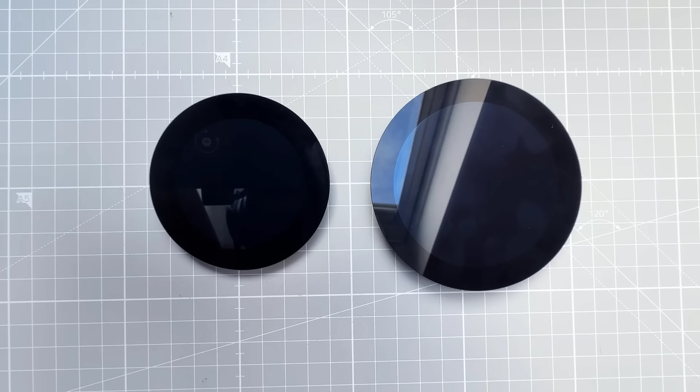So in the last two projects, I have used those Nextion round displays from the new Edge series, and I thought it would be nice to have some kind of housing, some kind of enclosure for those displays. And I have a 3D printer, so I can create something like this, but can I get something made from metal?

Well, the answer is of course yes, because I have a new machine called the Makera Carvera Air, and I will try to use that machine for the very first time to create something useful and, of course, as usual, show all my steps.

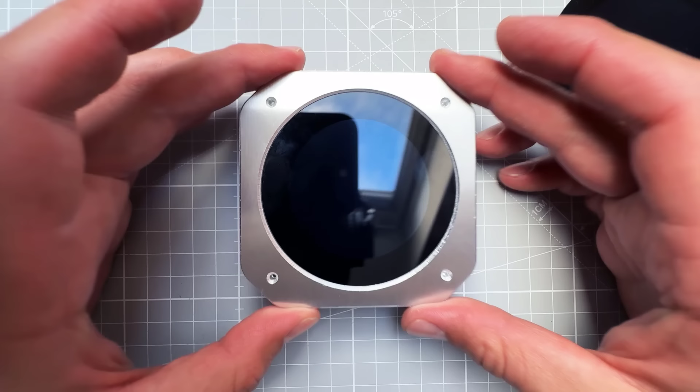And on top of that, I will also share a very secret tip from a friend of mine who is a professional CNC machinist. Actually, if you are only looking for the advice from the professional, you can jump to this section and see that.

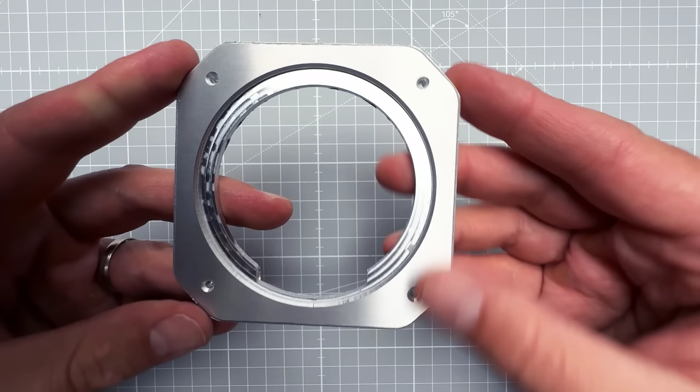And I will also show you how I spent a day, actually multiple days, cutting out this piece and then ruined it in the very last step. You can see this edge, it just looks horrible, and that's completely my fault, so I had to start all over again. So with that said, let's get started.

I have two blocks of aluminium for today's project. Both of those are 10 by 15 centimeters or 100 by 150 millimeters, but one is only 5 millimeters thick and the other one is 10 millimeters thick. And that kind of dictates what kind of project I can do today, because as you can see, the bigger 2.8-inch display might fit, but it might be a very tight fit. So for that reason, I will go with the smaller display, which is only 2.1 inch, and that should give us a little bit more space around that display for some kind of enclosure.

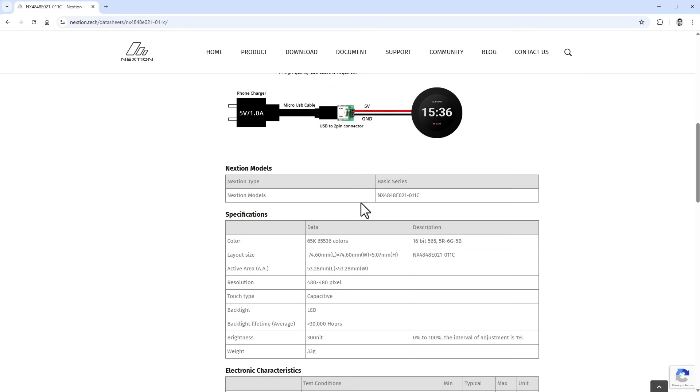So let's get the calipers and measure the size of the display, which seems to be around 74 millimeters. And just in case, we can also check the datasheet for that display to make sure that our measurement was correct, which seems to be the case.

And then we can start creating that enclosure. As with many of my other projects, I'm using Autodesk Fusion, which you can use for free for personal projects. I will start by creating a new sketch, so hit the Create Sketch button and click on the floor plane, which is this one.

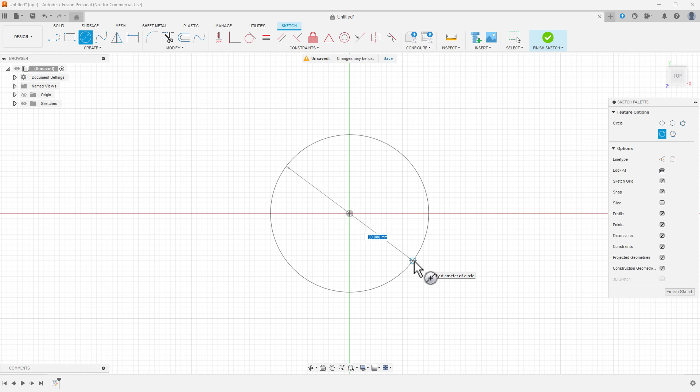And then let's create a circle from the center of the sketch in the size of our display, which was 74.6, but let's give it some breathing space and go, for example, with 75 millimeters. So this is the size of our display, and that will be the size of the hole inside the aluminium block.

And if we take a closer look at the display, on the back there is this double-sided tape. So let's just create a little bit of offset on which this double-sided tape will be glued. And if I again take calipers, we have quite a lot of space in here, at least 5 or so millimeters. But that's not the case down here, so we have to account for this part of the design.

And let's just measure the width of this area, which seems to be around 36 or so millimeters. So let's just keep this shape in mind and of course those numbers in mind, and let's go back into Fusion.

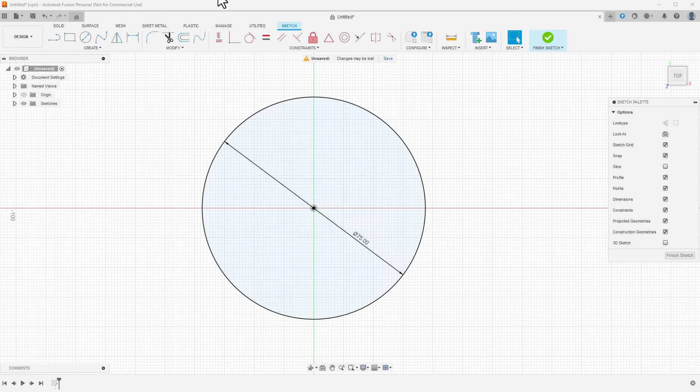And let's use the offset tool to offset the circle by 5 millimeters inside, so -5 to the inside. So this area will be used for gluing the display except for the bottom part. And for that one we will offset the circle one more time, but only going to -1 millimeter this time. And then we can draw the line in the size, in the width of this area.

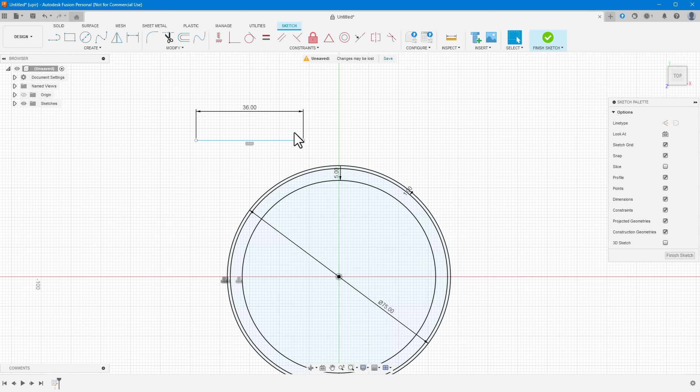So just draw the line anywhere, just make sure that this is the horizontal line and the size should be 36 millimeters. And then we can select that line and use this constraint called the midpoint. So click the midpoint, this line, and this point, the center point, and that will move it to the center of the design. And then we can use the line to draw the line from this point down to that point on the circle and do the same thing on the left side.

Finally, let's draw the outside shape of the enclosure by going to create rectangle being the center rectangle, and of course start from the center of the sketch. And just because our aluminium block is 150 by 100 millimeters, we need to go with something smaller, and I think that 80 by 80 is just way too small, so I will go with 90 by 90.

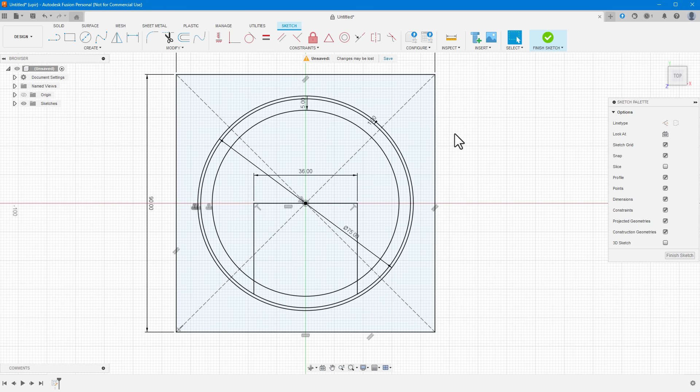That should give us a little bit of space on the outside, while still keeping enough material around the display. So click the Finish Sketch button, and then we can rotate the view a little bit, maybe like so. And we would like to extrude those parts by selecting the Extrude tool.

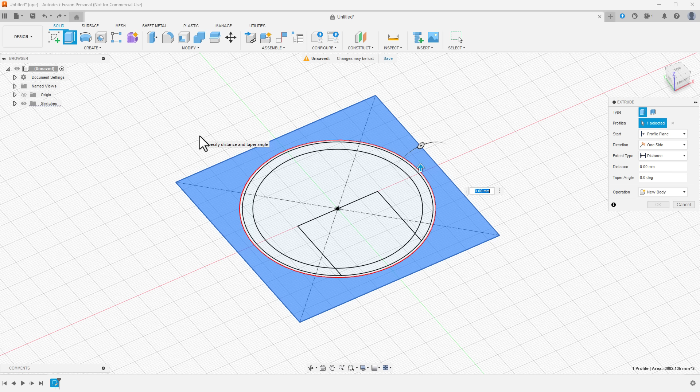For the outside of the display, which is this part, we will not modify the height in any way, so we'll go with whatever we have. I'll use the smaller one, which is 5 millimeters tall, so 5 millimeters for the height.

I will open the sketches and show the sketch one more time, because I want to also extrude the inner part, which will hold the display in place. So click the Extrude button again and select this part and this part. I can rotate the view to make sure I'm selecting the correct parts.

I will extrude it a little bit less, for example only by 3 millimeters. Then we can hide the sketch so it's not getting in our way, and we have the base shape for holding our display.

Now to give it a slightly more interesting shape, I think we can use the chamfer tool and chamfer those 4 edges, so this one and that one and this one and that one, and use whatever value feels right, so maybe like 15 or 14 millimeters.

Then we can round those edges using the fillet tool, so fillet this edge and this one and also all the other ones. And for the fillet, let's for example go with 10 millimeters.

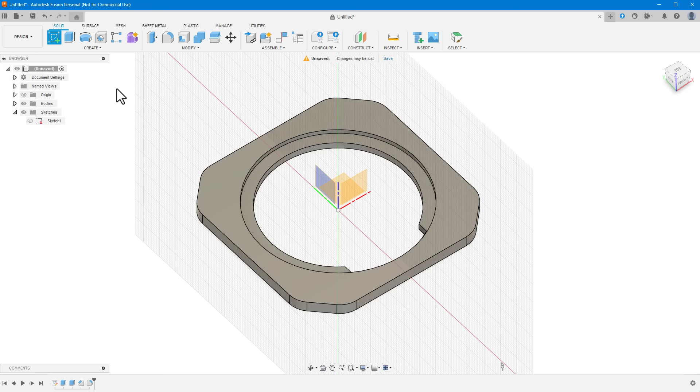Now, since I also want to try drilling, let's add some holes. For that we will first create a new sketch on the floor plane, and create a new rectangle being the center rectangle. Let's imagine that every corner will be a hole, so let's give it this size, like 66 by 66 millimeters.

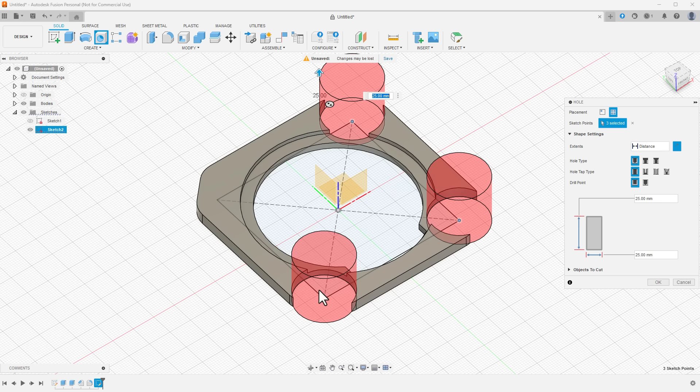Then finish the sketch, and click the create hole button, and click all those individual dots on this rectangle. We only need to go to 5mm depth, and I have some drill bits with the 2.5mm size, so let's go with this size, then click OK.

Finally, let's add some chamfering by selecting the chamfer tool, and for example chamfer this edge to 1mm, or maybe 0.8. If you want to use different values for different edges, we can click this button, so add selection set, then select this edge, and maybe go with the same value for now.

Finally, let's add one more selection set and select those holes, and for those let's go with 1mm. Then click the OK button, and I think this could be our final shape for holding the display.

But before we actually cut it from the metal, let's try to 3D print it first. We can either right click this body and select Save as Mesh and save it as a 3MF file, or we can just go to the file and select 3D print.

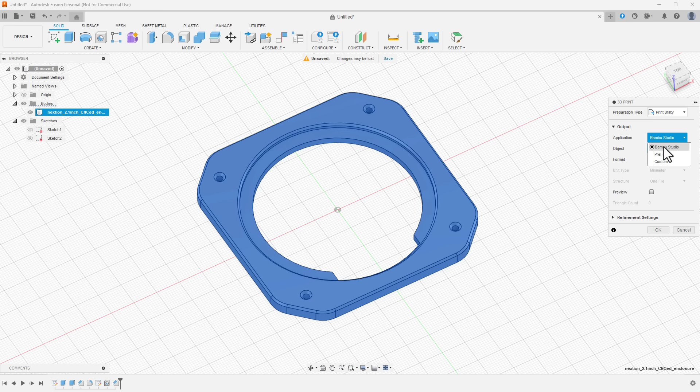Then select the body, and if you have the application already selected, like I do, you can just click the OK button and it should start the application. We are only loading the geometry data which is expected, and I don't want to update this Bambu Studio.

I've pretty much used all the default settings, and I've used the white PLA material mainly to make it more visible during the time lapse.

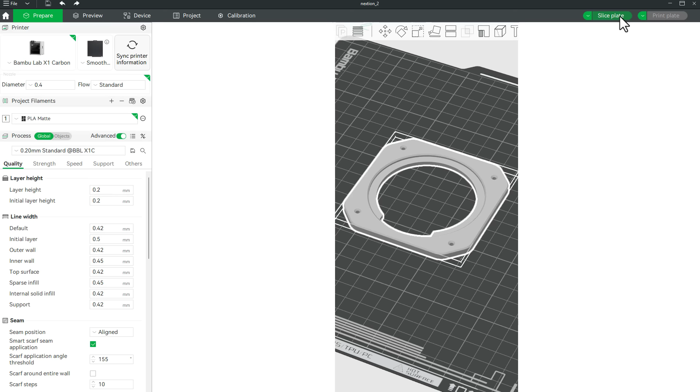So with no changes done, let's click the slice plate button to show all the individual layers, and there shouldn't be any surprises, but just in case, let's see the model how it will be printed. And again, no surprises in here.

So I think we can click the print plate button and just print it on the 3D printer.

And here is a short time lapse that was recorded by the 3D printer itself. And here is the actual 3D printed piece.

So we should be able to take the Nextion display and put this inside, and of course make sure it's aligned and rotated in the correct orientation. And it seems to fit nicely inside.

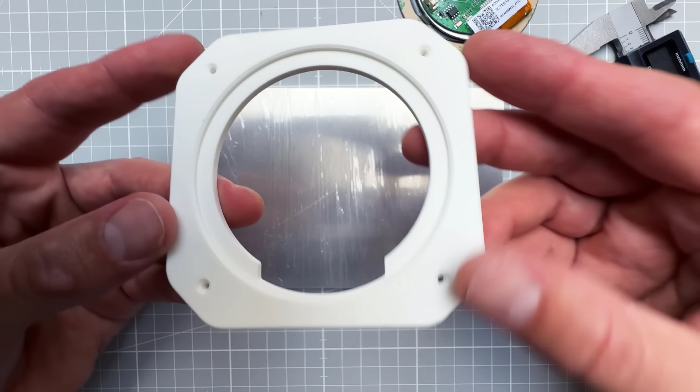Which means it's time to recreate this 3D printed part from the metal, from the aluminium. We will not use the very same 3D model, because on this model we have a lot of chamfering, so chamfering on the inside, chamfering on the outside, and also chamfering around those holes.

And when we machine those parts, we will use this chamfering bit, so this chamfering bit will go inside and outside and around those holes.

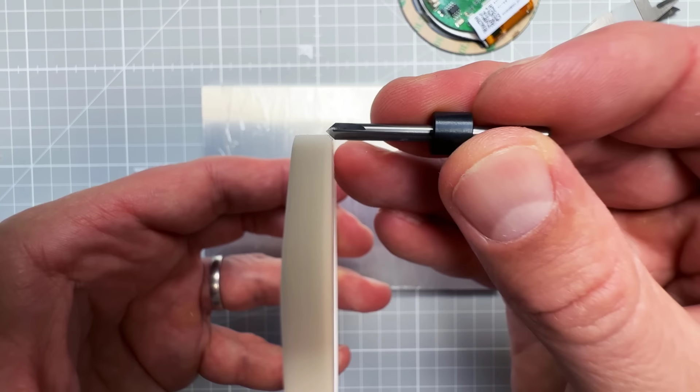If you imagine the path, it will actually be aligned to the unchamfered edge. So it might be beneficial to export this 3D model without the chamfering, because then we can control how much chamfering we want to apply by setting how deep the chamfering bit will go into the material. Let's go back into the Fusion application.

Before we export this, let's not use the chamfering by right-clicking this chamfering feature and selecting Suppress Features. Now we have the model without any chamfering, and we can export it by going to File, Export, and for the file format, let's select the step file and export it somewhere.

We want to use that file for the Makera Carvera. If we go to the Makera website, we need two different applications: the first being Makera Cam, which will import our 3D model and create the G-code for the machine, and then later on we'll use the Makera controller to run the G-code on the machine.

So let's start with Makera Cam and download this application. As we run it, we want to create a new project being the 3-axis project, so not using the rotary extension, just 3-axis for now.

As a very first step, we want to set what kind of material we will use in our machine, so click this Edit button. We'll go with aluminium, and our size is 100 by 50 millimeters, 5 millimeters thick.

But I think I'll set the material to be 100 by 100, because when I do so, when I import the 3D model it will be centered in the 100 by 100 size. So in theory I can use that extra 5 centimeters, or 50 millimeters, of material for something else. So again I'll go with 100 by 100 by 5 millimeters and click OK.

Then we can import our 3D model by going to File, Import 3D Model, and select that exported step file. Just like in any other 3D tool, we can rotate the view and see the model. It acts slightly different than in Fusion, but yeah, we can see the model.

The good news is that unlike 3D printing, we don't have to do everything at the same time, so we can start from bits and pieces and gradually remove the material from the aluminium stock. I think I'd like to start with this inner part with the lip that will hold the display in place.

If we open the options for 3D path, we have a few of them. We can, for example, try to use the pocket tool to remove everything inside, so select the 3D pocket tool. Then we have to click the face - this face, I want to remove this face or everything that leads to this face.

For the tool itself, I'll click Add Tool and go with the metal bits, using the biggest one, this being 3.175 by 12 millimeters. All the settings should be automatically set for us based on the selected material, so just click Choose, and then we can try to go all the way to the bottom and click Calculate.

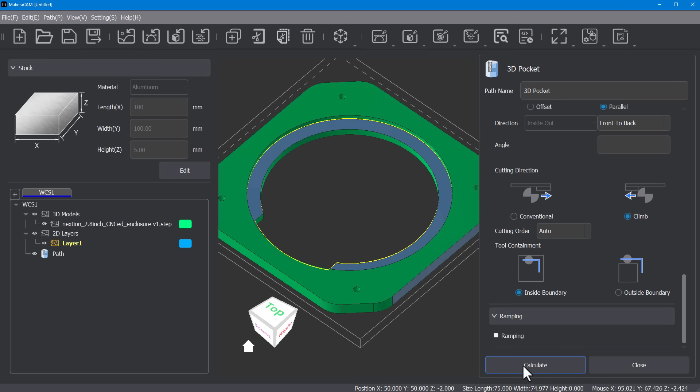That will calculate the path, but it's actually removing much more than we need to. The thing is, we only need to remove material from this face, this area, because later on, in the next step, we will remove everything from the inside like so. So by removing all the material from this area, it's just wasting time.

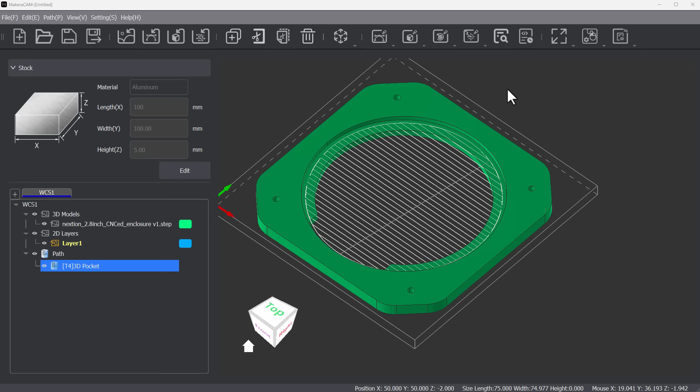We can actually preview what's going on by selecting Preview Toolpaths, selecting the toolpath and clicking the Preview button, then clicking Play, and we can slightly speed it up like so. As you can see, we are removing everything from this area which is unnecessary.

So let's just exit the preview and delete this path by right-clicking and selecting Delete - yes, I want to delete that one. And instead of using the pocket toolpath, let's go with the simple contour toolpath.

So select the 3D contour, and then we need to get the path from the 3D object by selecting the face and clicking on that face. Then click Generate Contours and select the path which is the outer one. I'll use the very same tool, so Choose Tool, and I'll use the biggest one for metal again, and click Choose.

I think I will keep all the default settings. I want to cut inside, so I just click the calculate button, and you see that we have now this kind of toolpath. Again, we can preview this toolpath, so select this toolpath and click the preview button. I don't know how visible it is, but it's just cutting inside like it's expected.

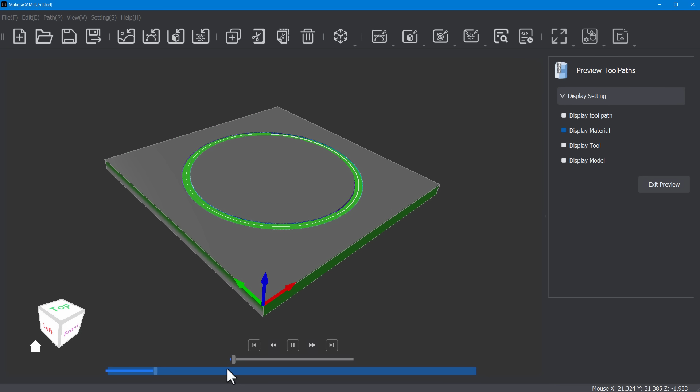Let me speed it up a little bit for you, but this time it's actually not cutting enough material. That's because if I show the model, you can imagine how big the bit is, so it's about that size.

We are only cutting this material away, but we still need to cut this part away. So we probably need a second path. Let me duplicate this 3D contour, and then edit this toolpath. Because this tool has the step over set to 2 millimeters, which is the distance between individual passes, I will offset this path 2 millimeters inside and click the calculate button, and it seems like we need to again select that very same face. So select that face, generate contours, click the outer one, and then click the calculate button.

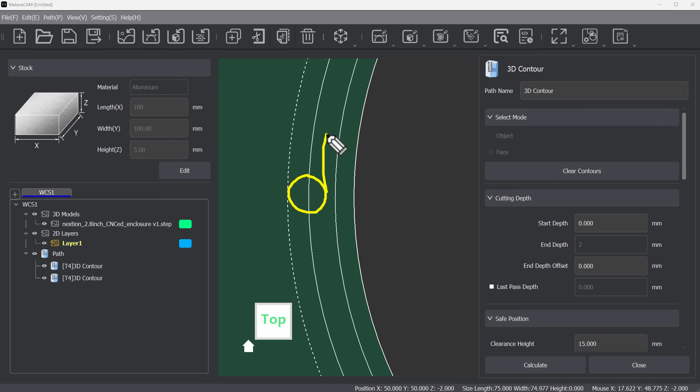And we have a second toolpath which is offset by 2 millimeters. I think this should be sufficient because this will remove this kind of material, and this second toolpath should hopefully go over this edge.

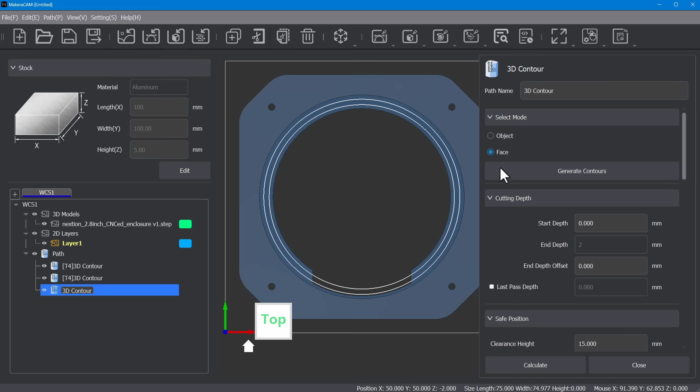But just to make sure and be on the safe side, I've created a third one by duplicating that one and offsetting this not by 2 but by 4 millimeters. I think we still need to select that face, so click clear contours, select that face, generate contours, select the outer one and click the calculate button. We should have 3 toolpaths in here.

It looks something like this, and we can again click the preview toolpaths button and preview all those toolpaths. Click preview, show it from the side, then run it and maybe speed it up a little bit. So it will cut the first one, the second one, and then the third one. By the end of this operation, we should have something that looks like this.

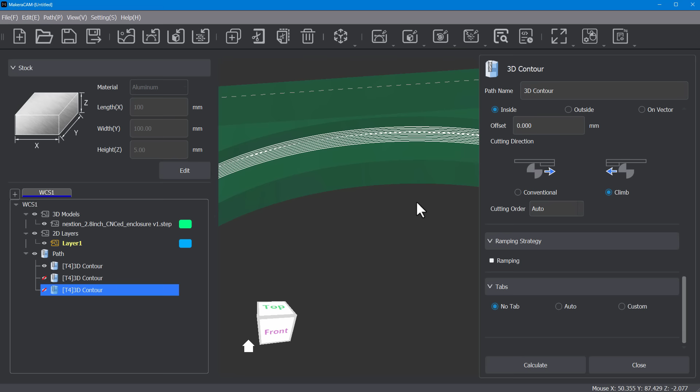Now before we export this as G-code and send it to the machine, I will make one small change, and that is to edit the toolpath. Down here there is something called ramping, and what this does is gradually move the tool into the material. So right here, if I can find the beginning of the toolpath, it will just go straight into the material. But if we enable ramping and set some distance, like 20 millimeters, and click calculate, you can see that now it gradually goes into the material, and we can probably extend the lifespan of that bit a little bit.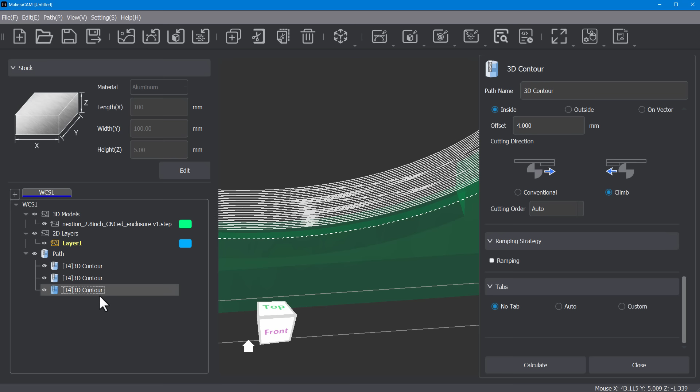Click the calculate button and close it, and do it for the second toolpath, so edit and enable the ramping with the same parameters, and click calculate. Then for the third one, edit and enable the ramping, 20 millimeters, calculate and close. I think that we can actually cut this from the aluminium now.

To do that, we need to first export those three toolpaths as G-code, and you might notice they say T4, that's for the tool, and the tool number is quite important on the Makera Carvera machine, which has the automatic tool changer. That's not my case because on the Air version there is no automatic tool changer, but we can still edit this path and change the tool number to tool number 1.

Do that for all three paths. Now all the tool paths are T1, tool number 1. Then we can export those as G-code by going into the path menu and selecting export. We can still change the tool number here if we decide to do so. Just make sure all three paths are selected, then click export, use some meaningful name, and save that file somewhere.

Before importing that G-code into the other application, let's actually take a closer look at the Makera Carvera machine.

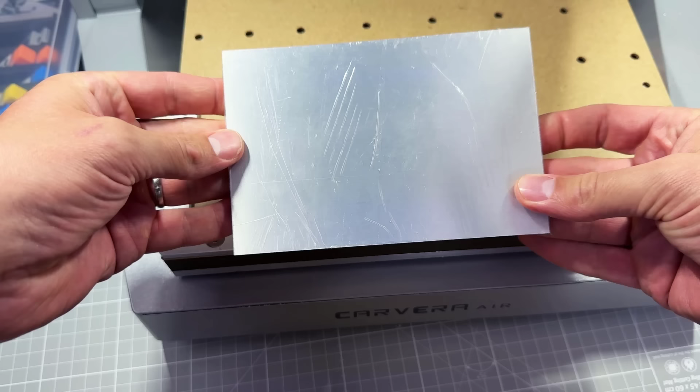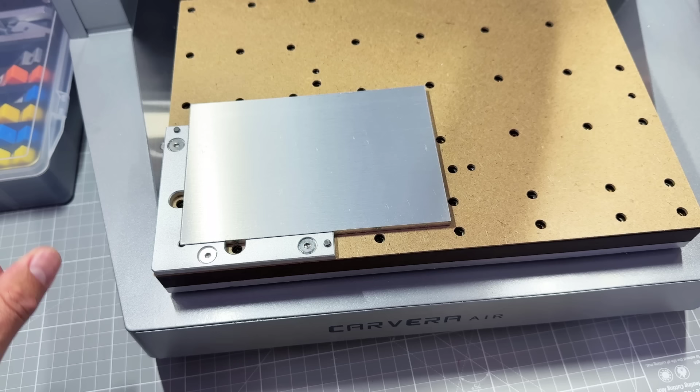We need to put a block of aluminium somewhere on this work area. While we can put it anywhere, it kind of makes sense to put it on the left bottom corner, because if we do so, this bottom left corner of the aluminium block is actually the 0 point.

Now to keep the block of aluminium from moving anywhere, we need to somehow secure it, and we can use screws on this bottom, and then we can use those clamps to also secure the other edges.

Now one important thing to keep in mind is the size of our part, which is 90 by 90 millimeters. And just because the stock size is 150 by 100 millimeters, that means that on the shorter side we have 5 millimeters above and 5 millimeters below.

But we have to account for the bit size, and we will be using this bit, which will go on the outside, and the diameter is 3.175 millimeters, which means that we have only about 2 or so millimeters for those clamps. So we don't have much space, but let's try that and hope that nothing bad will happen.

So with the aluminium part secured in place, we will actually not yet insert the tool into the machine, but instead we will go back to the PC.

And in here we want to download and run the other tool called the Carvera Controller. You can also get this tool for your phone, either the Android or iOS, but for now I will use the Windows version.

And what we want to do first is to connect to the machine, and we can either use the USB connection or the Wi-Fi connection. Actually, the first time you connect to the machine, you need to use the USB connection.

Here's a pro tip: usually when you buy USB cables, they are kind of short, even the one provided with the machine isn't very long. But you can buy longer cables. I was able to find one which is all the way to 8 meters long, that's pretty long. Although I haven't tested this one, but I have tested the 5 meter version and it was working without any problems.

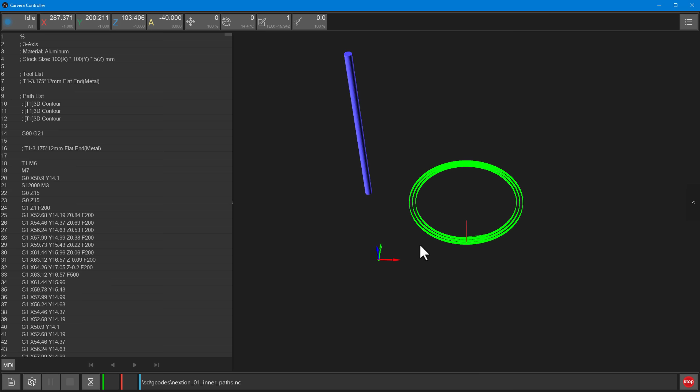So we can run this on the machine by clicking this button. And here is some configuration which was slightly confusing because we do see the L bracket, which is on the left bottom. That's where we placed the aluminium block. But we actually don't see the aluminium block itself because that will be like maybe, that size or this size.

So this will be the aluminium block that we have inside the machine. And then this green line is the toolpath, but it's actually not the toolpath itself, but only the boundaries of those toolpaths, which might look something like this.

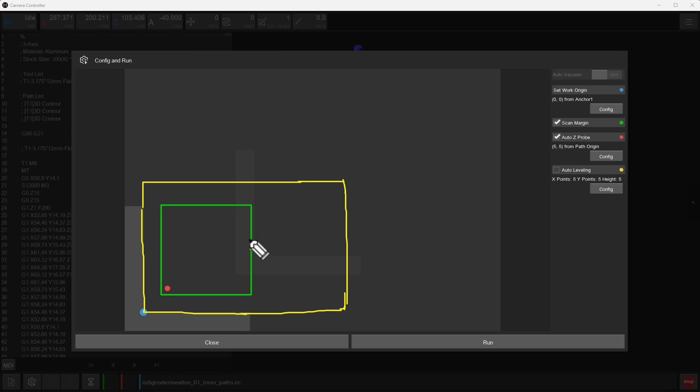So we have 3 toolpaths offset by some amount, and please excuse my very crude drawing skills, but this will be actually cut from the material itself.

So even when it looks like it's not starting from the 0,0 position, it actually is starting from 0,0 position. It's also shown in here. It's just that our toolpaths are not going from 0,0, they are slightly offset.

And we can better see it in the MakeraCAM application. So this is the 0,0 position, but you can see that the toolpath boundaries, they are starting from around here. Inside the settings, there is this scan margin checkbox.

And if you check that checkbox, it will use the laser pointer to show the area where it will be cut. So it will show the boundaries of all those toolpaths.

And then we have this auto Z probe, and that's this red dot, and that's the place where it will measure the thickness of the material.

But if you are not sure if the thickness of the material is the same across the entire surface, you can also use the auto leveling feature, and that will basically measure all those individual points, all those individual thicknesses, and it will account for any height variations.

Now, while this feature is more aimed for things like PCBs or some thinner materials, and our aluminium block should be pretty flat, I don't think it will hurt to use that feature just so we can see how it works.

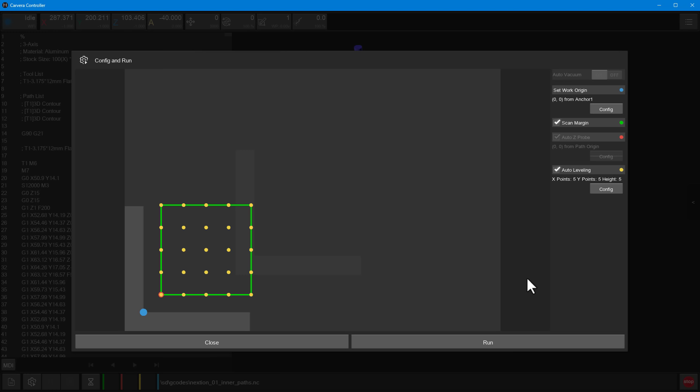We can now press the run button because as long as we have auto Z probe or auto leveling enabled, the machine will not do any cutting before it does those operations. For that, we need to use the probe tool, and the machine will wait before we insert it. So we can press run and nothing will happen, except it plays a beep sound.

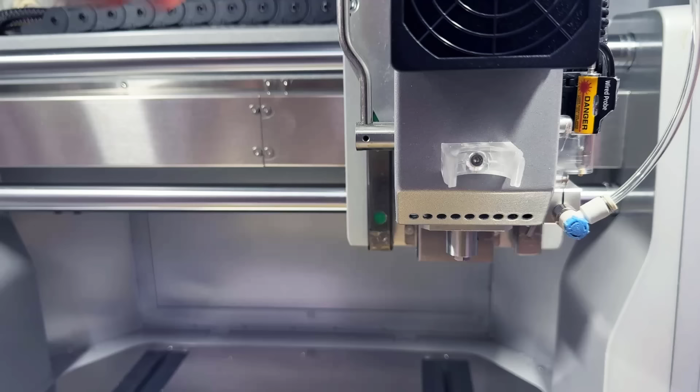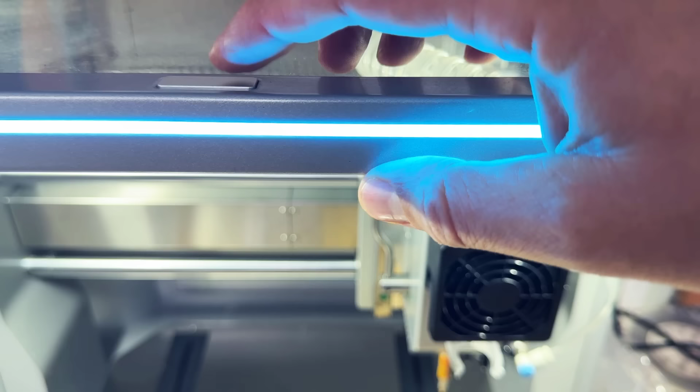And telling us to insert that probe tool. With the quick tool changer, we just put down the lever, insert the wired probe tool which is stored on the right side, then put up the lever to secure it in place. The machine light should be blinking blue, waiting for us to press the one and only button on the machine. Once we do, the machine will measure the height of the probe tool.

Then it will show the toolpath area using the laser pointer on that probe tool - that's the green rectangle we've seen in the Carvera controller application. Let's wait until it finishes showing the boundaries. Then it will move the probe down to measure the height, the thickness of the material. Because we've selected the auto leveling feature, it will do the same operation 25 more times.

Let me speed it up a little bit. Once this is done, the machine will play the beep sound, and the light strip will blink, but only the first section, indicating we should insert the first tool. So let me take out the probe tool and instead insert our bit.

Once this is done, we can again press the one and only button on the machine. You can see on the back, on the right side, it's again trying to measure the size, the height of our tool. Then it will move the tool over the aluminium block and finally start cutting.

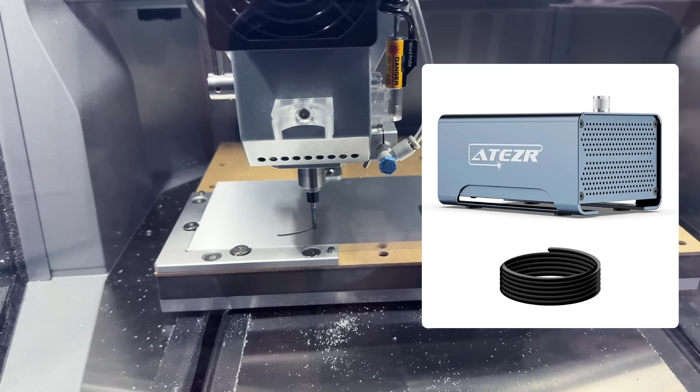It might not be visible in this video, but I've closed the lid of the machine because once we start cutting, those chips fly everywhere. Also because I'm using the air compressor, which is advised when cutting metal. I've actually used the air assist from my laser machine and it's working just fine. The air comes from this small pipe and blows on the tool and on those chips.

At any point, we can see what's being currently machined inside this Carvera controller application. You can also get this tool for your phone, but only one application can be connected to the machine at a time - so if you're connected from the PC, you cannot connect from the phone and vice versa, unfortunately.

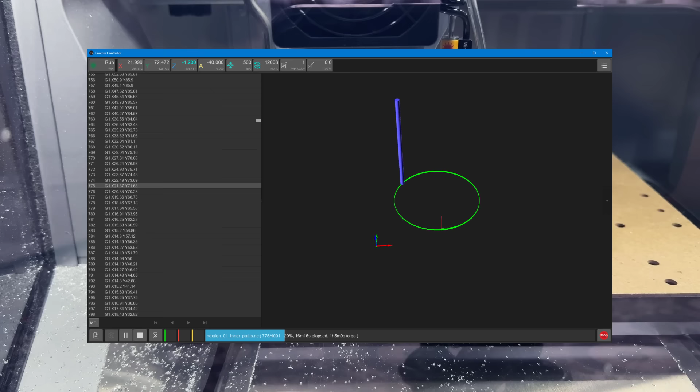Let me speed things up and jump forward in time slightly. This is currently cutting the second toolpath. Here's a close-up view, and you can nicely see that after this small machining there are quite so many chips inside the machine. So when operating this machine, you will use a vacuum cleaner a lot.

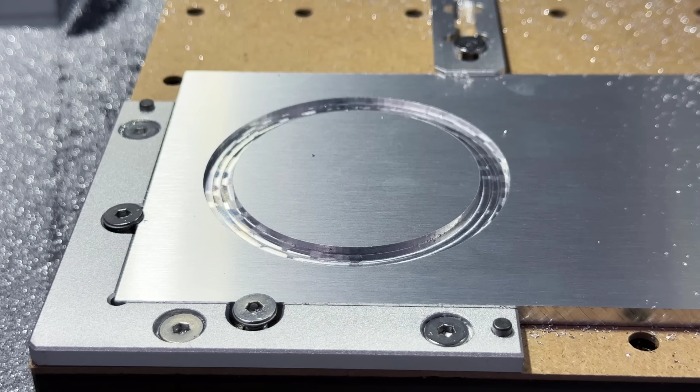Now this is finished, but I will not remove the aluminum from the machine just yet, because I want to chamfer this outer, bigger edge. For that I'll use this chamfer tool, which has a 90-degree tip. It will travel along this edge on this path to create a nice chamfering, and we can set how much to chamfer by setting the height or depth of this tool.

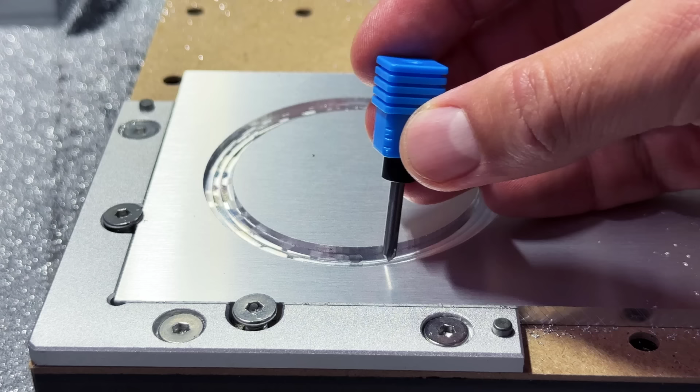The nice thing is that as long as we keep the aluminum inside the machine and don't remove it, we don't have to do any probing, because it will remember all those values. Which means we can immediately insert this chamfer tool into the machine and go back to the PC.

In the MakeraCAM application, let's hide those 3 toolpaths we've already machined, and create a new toolpath - a 3D chamfer toolpath. We want to chamfer this edge, but first we need to click this edge, select Generate Contours, and then click the edge itself. So this will be the chamfered edge.

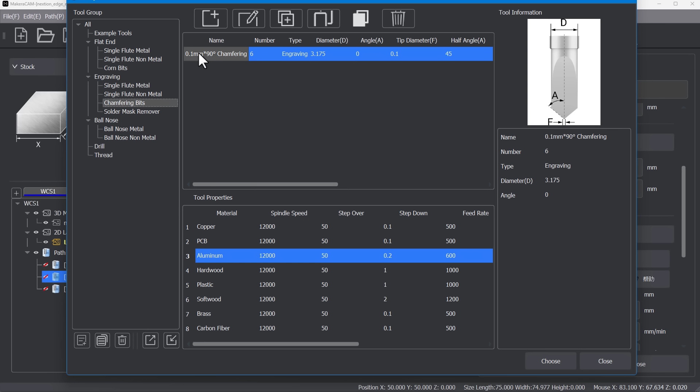For the tool itself, we'll use the one and only chamfering tool, which I believe is inside the chamfering bits - this one, the 90-degree chamfering tool, so choose that one. And we're setting the chamfer depth to 1 mm, which I think is a nice start.

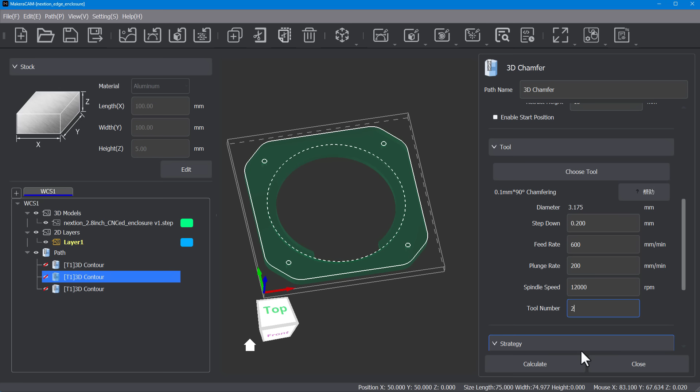We can start with 1mm and see how it looks. Let's keep all the default settings, except for the tool number, I'll choose a different tool number from those 3 toolpaths, so maybe tool number 2. Because if I keep the same tool number and don't do any probing, the machine will think the tool is already in there and won't wait for anything, it will just start cutting right away, which isn't what I want. So I'll set it to a different tool number even though there's no tool changer on the Carvera Air machine, then click calculate and it will calculate this toolpath, which looks like this.

It should go on the edge itself and just cut inside. Let's simulate this path by clicking preview toolpath, then simulate all 4 paths and run the simulation, speeding it up a little. So the first one, the second one, the third one, and then there will be this chamfering going on.

Since this looks how it should look, let's export this toolpath by going into Path Export and only export the last one, which will be the chamfering, and save it as G-code. Then jump into the Carvera controller application and open that file. Click upload file, select that file, select upload, and select.

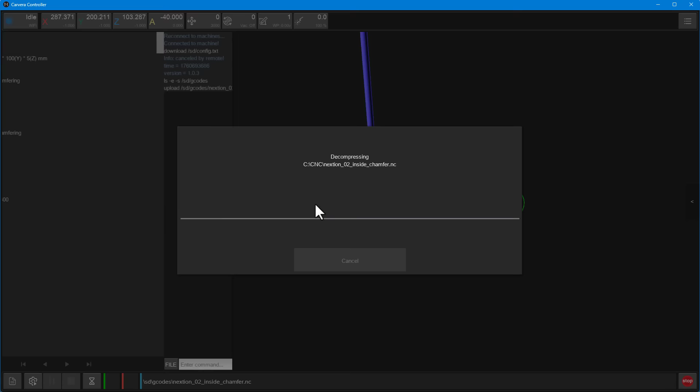This will be much shorter and much quicker compared to the previous toolpaths. Click this button to run the G-code. I don't think we need to scan the margin, and I don't think we need to run the Z-probe again, because the machine is still running and we haven't moved the aluminum block anywhere, so all those settings should still be stored inside the machine. We can go right to cutting and just click the run button.

After the machine measures the height of the tool, it will start cutting, and again this is a fairly quick operation, taking about 2 minutes or so, but this is a sped up version just so I'm not wasting any of your time. In the end, we should have a nice chamfered edge.

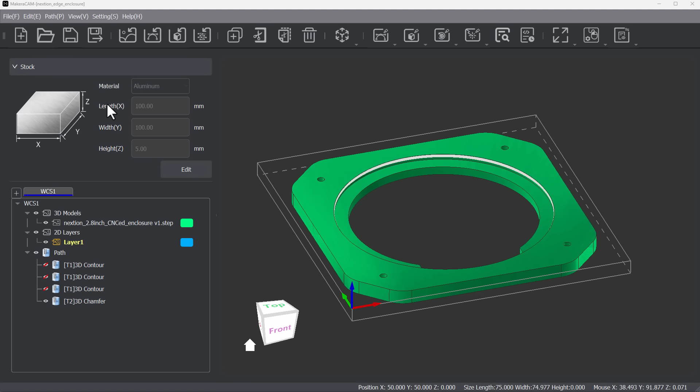Let's continue with the next step, which will be removing everything inside so we have space for the display itself. That will be machining out this area, but we don't have to machine everything inside, we just need to machine this path, so we'll just remove this inner section.

I think we can again use the 3D contour toolpath, so click 3D contour. Then select this face, the top face, generate contours, and select this contour. For the tool, we'll again select the biggest metal tool we have, the 3.175mm flat mill. There's a small problem which might not be immediately visible, because we're cutting inside of this you can imagine there's this tool just traveling around this path.

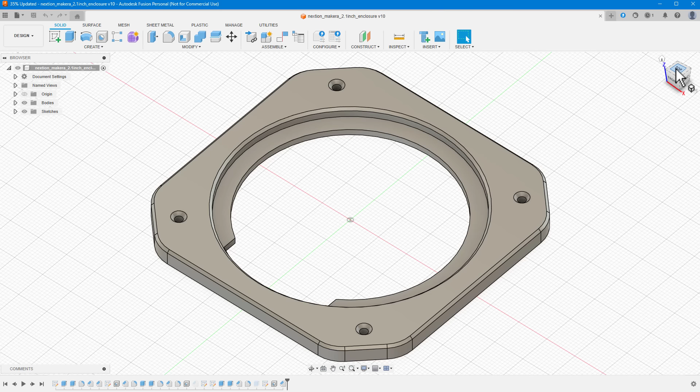Let me show this in Fusion. This is our 3D model, and we want to cut the inside, and this is the size of the cutting tool, so you can imagine it's just traveling around this path, and this is probably fine, we can just cut this corner without any problem. But for this inner corner, you can see that no matter how close we get to it, we can never cut this area from our part.

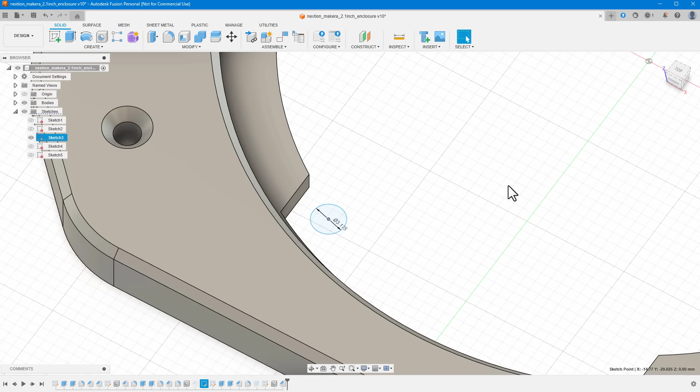I think the easiest way to fix this is to actually modify this model to not have those sharp edges, but to round them a little bit. We need to round them by at least half the size of our tool, so 1.5 something millimeters. I think if we go with 2 millimeters, we should be fine.

Let me rotate the view, select the fillet tool, and fillet this edge and that edge. I think we can as well round those 2 edges, just so we don't have any sharp corners. Since we need to go with at least 1.5 millimeters, let's go with 2 millimeters, and that should be safe. Now if we move our tool along this path, we should be able to cut this corner without any problem.

So let me quickly re-export this model one more time, again without the chamfering, and save it as the step file.

Let's not use this path for now, and let's import the new 3D model again by going to File, Import 3D Model, which is this one.

Then we can create the 3D contour path, again click this face, then click Generate Contours, and select the inner one which is now around it. And go with our biggest metal tool, which is this one.

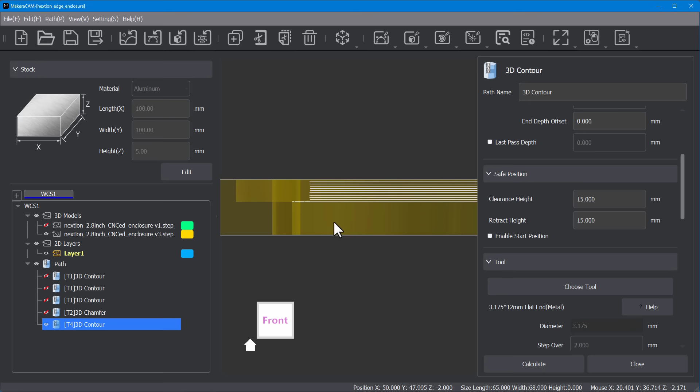Now if we hit the Calculate button, it will show us the path, but it will only go to this point. If I show it from the front, you can see that it only goes to that face, but we want to go all the way to the bottom.

So what we need to do is adjust the depth offset, which is currently set to 0 millimeters. Since we are going down to 2 millimeters and our stock size is 5 millimeters, we need to continue another 3 millimeters. If I click Calculate, now it goes all the way to the bottom.

But now we have a different problem, because once we cut this, it will just fall apart and it will most likely do something wrong. So we don't want to do that.

What's suggested is to use tabs, and tabs are small areas which will not be cut, so it will still be connected between the outer part and the inner part, and then we need to use some kind of saw or tool to remove those parts.

Now it's finally time to tell you the super secret trick from my friend who is a professional CNC machinist. He told me don't use tabs, that's just too much work, and instead don't go all the way to the bottom of your stock, so maybe keep a little bit of material still in there, so maybe go only to 2.9 instead of 3 millimeters.

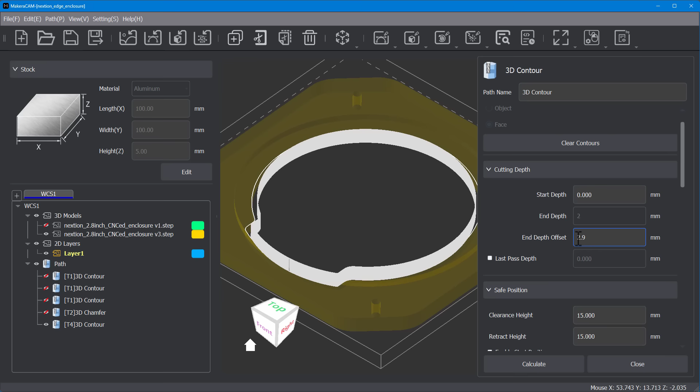So there will be a little bit of material, like 0.1 millimeter around this whole section, so again it will not go all the way to the bottom, it will just end slightly above. Then it should be possible to cut using the knife tool.

So let's try that, let's calculate, again I will change the tool number to tool number 1, calculate and close. And let's try to replay all those tool paths.

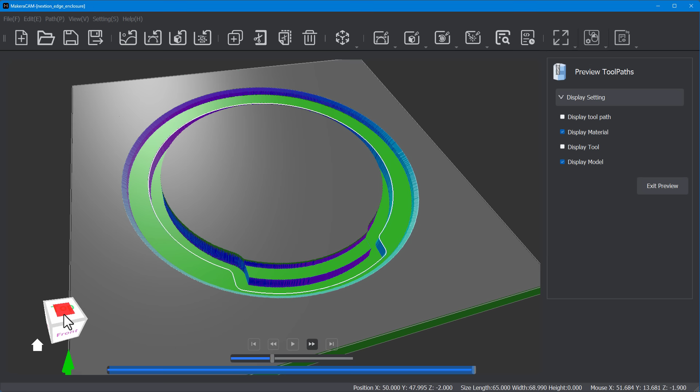So click the preview and run it and speed it up a little bit. We should hopefully end up with something like this, where we can easily remove the inner part.

So let's export this tool path, only that one, save it, and then jump to the Carvera control application. And of course load that file, so upload file, which is this one, upload and select.

I think you already know the next steps, and that is clicking this button. We don't need to scan the margin, and we don't need to use the Z probe, so just click the run button. I think it's time for another time lapse, because it will take some time to machine this area.

So let's speed up the playback a little bit. You might notice that even with the air assist, with the air compressor, some of those chips are still being trapped inside. That's quite unfortunate, because those chips might result in slightly worse looking edges.

The good news is that this inner part will be covered by the display and not visible. So let's finally unscrew those screws and remove the part from the machine.

You might be wondering, how do we know where to cut this part from the back of the stock? It's actually quite obvious once you flip it, and if it's not visible you can either press it slightly to reveal the shape, those edges a little bit more.

So let's take the knife and cut this inner part, and 0.1mm of aluminium should be very easy to cut.

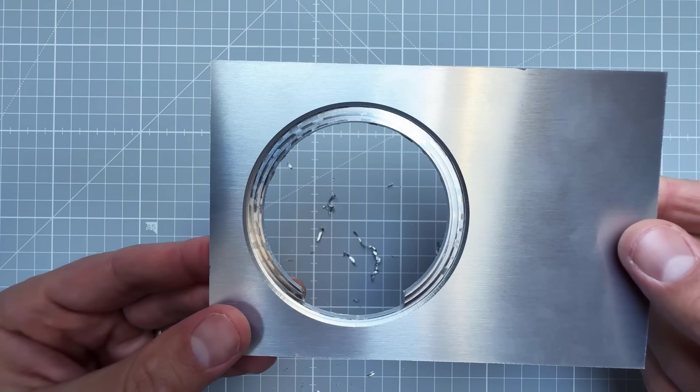I did clean up the edges a little bit afterwards using the very same knife, but in the best case we would use another chamfering pass on this edge to make it clean. But again, this is inside and will be covered by the display.

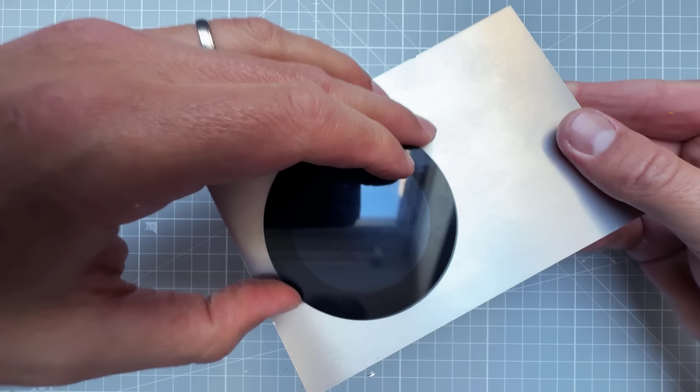We can finally put the display inside to see if it fits, which seems to be the case. Obviously we need to position it correctly to be at the right angle, but the hole size for the display seems to be perfect. So let's move on with drilling those 4 holes.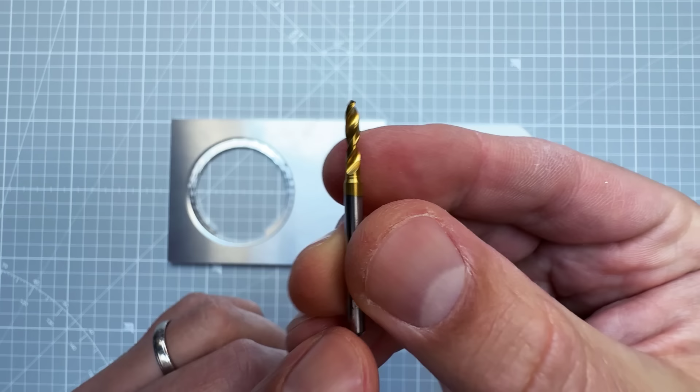While we can use the very same cutting bit that we were using previously for all those contours, I wanted to try to use a dedicated drill bit. So I've ordered those drill bits from Makera, and there is a slight problem.

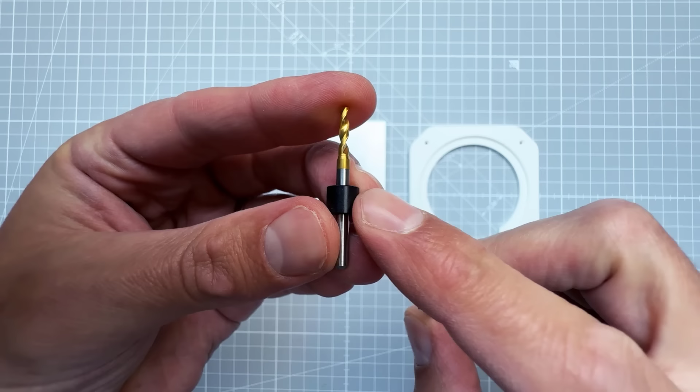This is how they look like, and this is how they should look like when I want to put this inside the machine. So there should be this black piece which is called the collar. In any case, we need to put this black thing on this drill bit. And as you might expect, it's a pretty tight fit, so you need some kind of tool to do that.

Thankfully with the Carvera Air machine you will get a lot of tools, one of them being this strange looking one. You want to unscrew everything, then put this black part inside, then insert those 2 spacers, then put in the actual drilling bit, and then screw those two parts together and keep turning this handle until it's not possible to turn it anymore.

You see that during this process the bit actually goes outside, so just be aware of it and don't cut yourself. And then when it's not possible to turn this anymore, we need to unscrew everything again. And here is our drill bit with the black thing on the correct position.

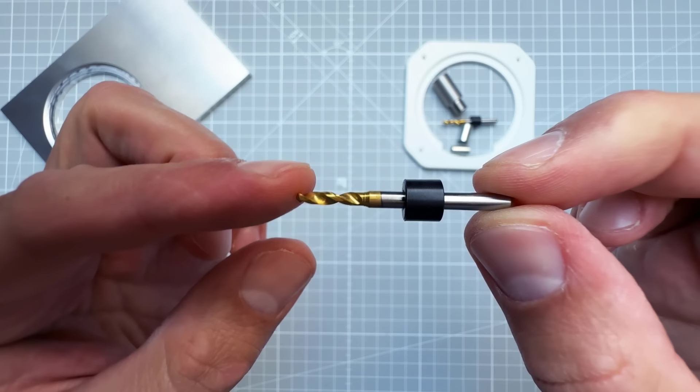So we have the tool ready and we can create our tool paths in the MakeraCAM application.

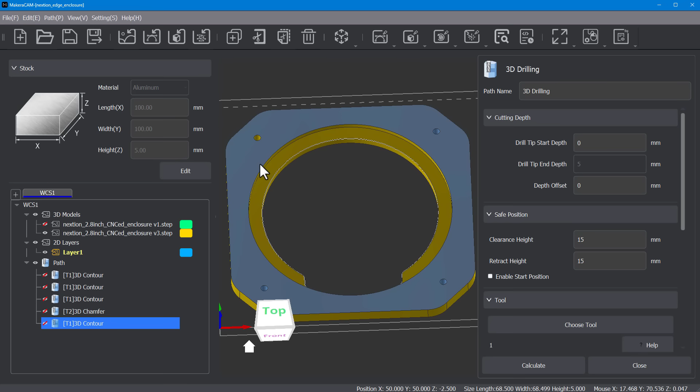Let's hide this contour toolpath and create a new toolpath, which will be the 3D drilling toolpath. And for that we want to select our holes, which is kind of hard to do because I keep selecting the thing that I don't want to select. So let's just select only the holes, and as the last step I will deselect the outer one by shift clicking the face.

Then for the tool I of course want to use the drill bit, and I have the 2.5mm drill bit, which is this one.

It will already be predefined with all the correct settings, but if we take a look at the shape of our drill bit, if we only go all the way to the bottom of our stock, we will actually not cut all the way through, so we need to add some extra depth to make sure it goes all the way through our material into the waste board, which is being placed below our stock.

So let's select this tool, and for the depth offset let's just use another 0.5mm and then click the calculate button to calculate this path.

And if you look from the front, you can see that this tool path goes slightly below the stock, so it will go into the waste board.

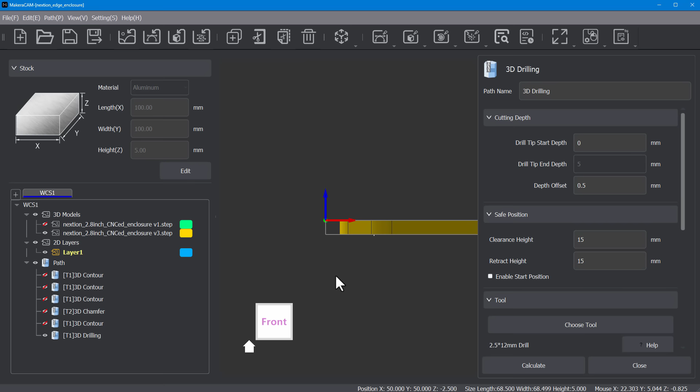Now for drilling there is some additional settings called the retract, which will basically just drill slightly into the material, then go outside, then drill, then go outside. I think we want to do that to easily remove those chips.

Finally change the tool number to some different tool number, for example tool number 3. Click the calculate button again, and then of course export this tool path, so path export. Only export the drilling path as the G-code.

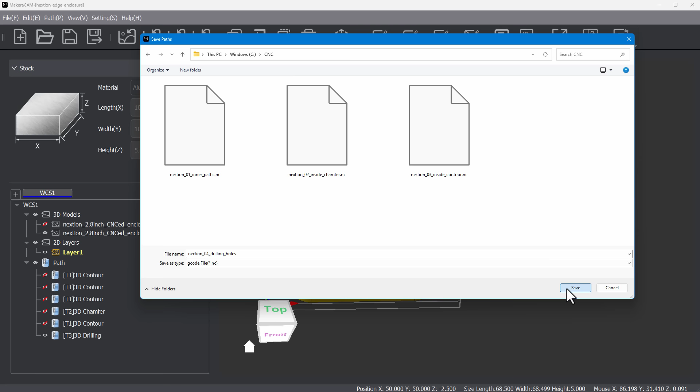Then load that G-code into the Carvera controller application, so that one, upload and select. And we do see 4 drilling holes, so just send this to the machine.

Since we have removed the aluminium block from the machine and now we've put it back, just in case let's also run the Z probe, so enable the Z probe and then click the run button.

As expected, the drill bit will start drilling those 4 holes, and as we've said, it will actually go down below the material into the spoil board.

That's the yellow brownish board below the aluminium, and it's there so you don't accidentally cut into the main metal base. Obviously you can buy a new spoil board from Makera, but if you have a laser cutter you can get plans for this board on printables and just cut your own from MDF.

So let me speed up the playback of the drilling process of the remaining 3 holes.

I think it's nice to always add a little bit of chamfering to not have those sharp edges. So let's jump back into the MakeraCAM application.

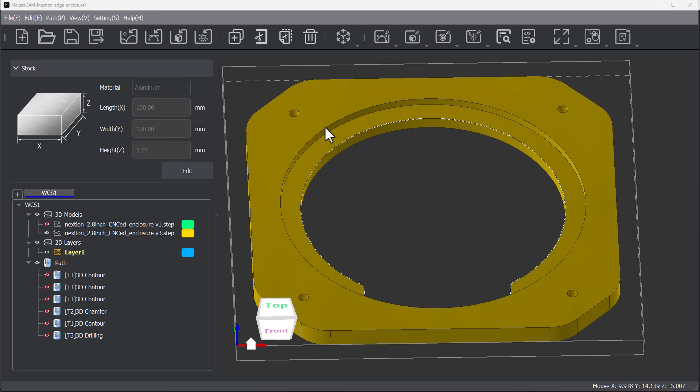Here we will add a new 3D chamfering toolpath around those 4 holes, using the one and only chamfering tool. Then generate this toolpath, export it as a G-code, import the G-code in the Carvera control application and send it to the machine.

Just because those holes are very small, this process should be very quick, but in any case let me speed it up a little bit.

And this is how those chamfered holes look like. Now at this point there is only one thing left to do, and that is to cut the outside shape. You should already know how to do that. We will use the 3D contour toolpath.

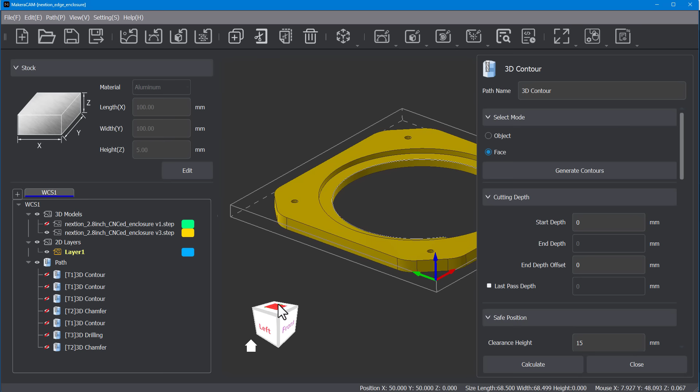Let's switch the view, select the bottom face, click generate contours, and select the outer contour. For the tool we will again use the biggest metal tool that we have. Same as for the inner part, we will not cut all the way through, but leave some space in between, for example 0.1mm, so we'll set the end offset to minus 0.1mm to not go all the way to the bottom. For the tool number, let's go with number 1, enable the ramping, and click the calculate button.

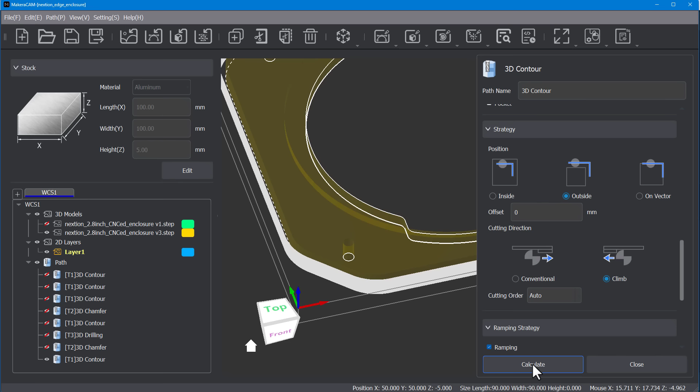Now you can see that it doesn't look quite right. We are cutting inside our shape, but we want to cut outside, which means we need to change the position from inside to outside, and then click calculate one more time. I think this path looks correct. So let's do the usual steps, select the toolpath and export it as G-code.

And load the G-code into the Carvera control application, so upload our new file, and then send it to the machine.

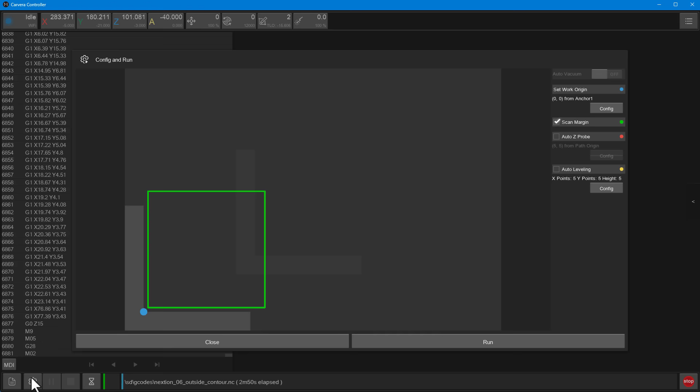And this process will take some time. Actually, it will take a lot of time because we have the step down set to 0.2 millimeters. So at any time it will only go 0.2 millimeter deep into the material, which means that for our 5 millimeter stock it will need to go around this shape 25 times.

As a result, it will also produce a lot of chips, and even with the air assist still on, blowing on the tool, a lot of those chips still stay inside the cutting area. That's not what we want, because it will make those edges, those cuts, slightly less perfect. So during the cutting process, I actually opened the lid of the machine and vacuumed some of those chips away.

It was kind of surprising to see that opening the lid of the machine didn't stop it, which is usually the case, at least for laser cutters. Also, if you take a closer look, you can see how close the cutting tool is to all those clamps and screws, but thankfully it didn't collide with anything.

So after this cutting was done, I decided to do one last step, and that is to add the chamfering on the outside edge. Which means adding the 3D chamfering toolpath on the outside edge, then selecting the correct chamfering tool, going on the inside, and then exporting this as G-code and importing that into the control application.

However, after sending this to the machine, it just went sideways. I think I set the wrong position for the toolpath. It should have been outside, but it was inside instead. As a result, you can see that the bottom of the cut of the chamfering is not clean, it's just somehow very fuzzy.

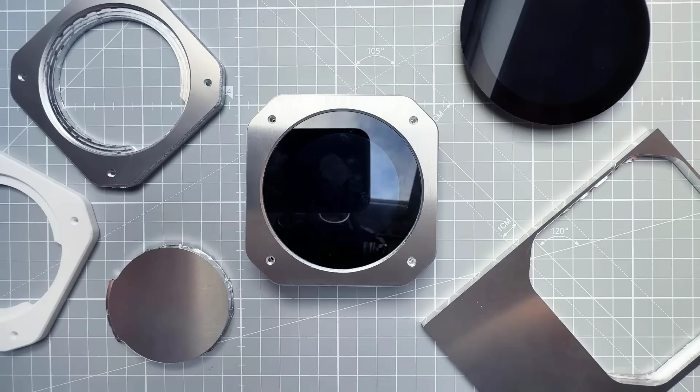The good news is that once you do something for the second time, it's always faster. The bad news is that wasting material, wasting aluminium, costs a lot more compared to, for example, 3D printing. With that said, I think this is still great.

I would never think that I would be able to produce aluminium or metal parts in my home using some desktop CNC machine, but here I am having the Carvera Air machine and I'm having a great time with that. Compared to 3D printing, there is a much steeper learning curve, but I think the result is worth the effort. I will definitely use that machine for my future projects, and I have a lot of ideas, but right now the biggest bottleneck is of course my knowledge.